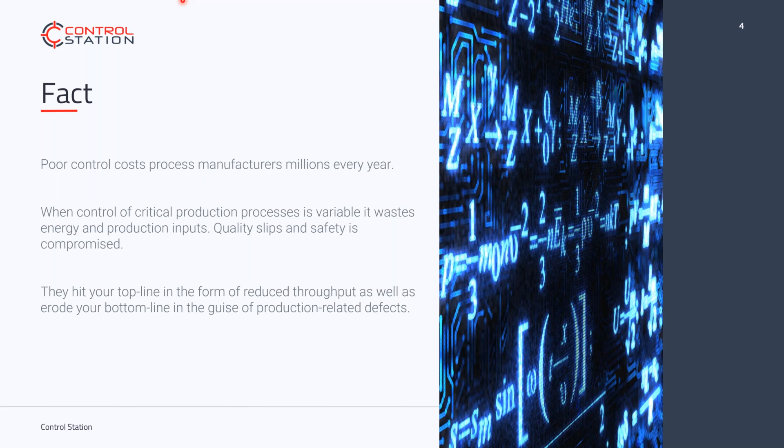there has been a decent amount of study on this. For example, relatively old, maybe 20 years ago, there was a UK-based study that talked about the economic effects of poor control. And this is what was seen: there was a decrease in throughput and yield of 2 to 5%. There was an increase in energy consumption

and product defects. Again, this is a relatively old study, but we have seen these effects come to bear time and again in different processes. The study was called Invest in Control, Payback in Profit. So basically, studying a variety of production plants, they were able to determine that these were pretty much industry standard things. And we've seen this anecdotally throughout our many years of experience with production plants.

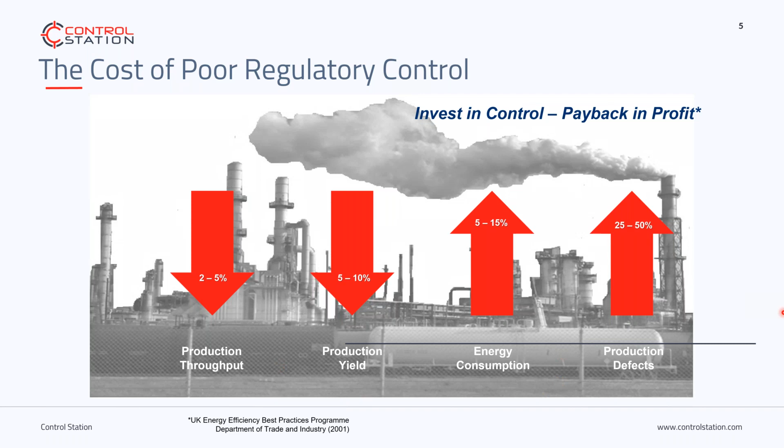Ooh. As I try to get to the next slide. Oy, my pointer is trapped. Just what I wanted to have happen right now. There we go.

Okay, good. So as I mentioned, even when a plant is in automatic mode, it still is not going to be operating at its most efficient 85% of the time generally, as found. When you have control-related problems or valve-related problems, we find that sometimes controllers are tuned poorly to mask those problems. Perhaps you have a sticky valve and you've decided to detune the controller to make that happen.

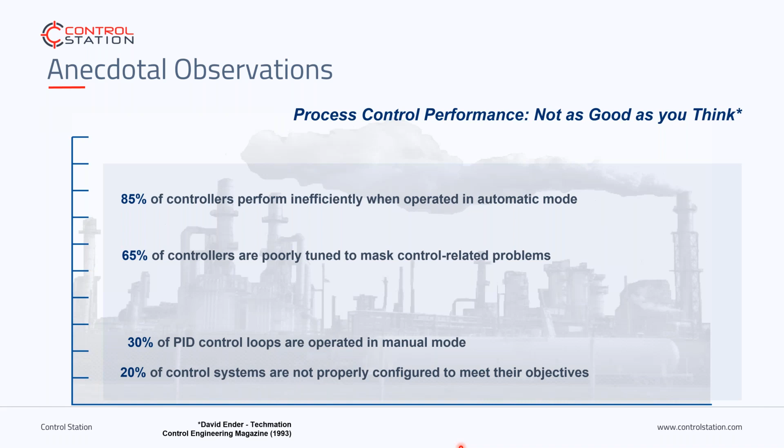There are many situations in which the control loops are operated in manual mode, 30% depending on the site, the time, and the operator. And just in general, a loop tuned to look good might not actually meet the total objective. For example, a surge tank might be tuned to have a perfectly flat level. Now, while that level might look awesome, it is not very well tuned.

But generally what happens is for all of these things, for yield and for energy use and for variability, generally the most profitable place to run is near a constraint. If you're trying to remove an impurity, you don't want to remove more than you have to, but you need to be below the constraint. Or for throughput through a plant, perhaps you want to be pushing as much through the plant as possible, but you don't want to cross.

So if you have variability in your process, on average, you're going to need to be operating at a certain distance away. But if you can reduce the variability, improve your control, then on average you can move closer to this constraint, whatever that constraint may be. Just having better control gives you more options and more safety, all these great things that we've come to recognize as the benefits of good control.

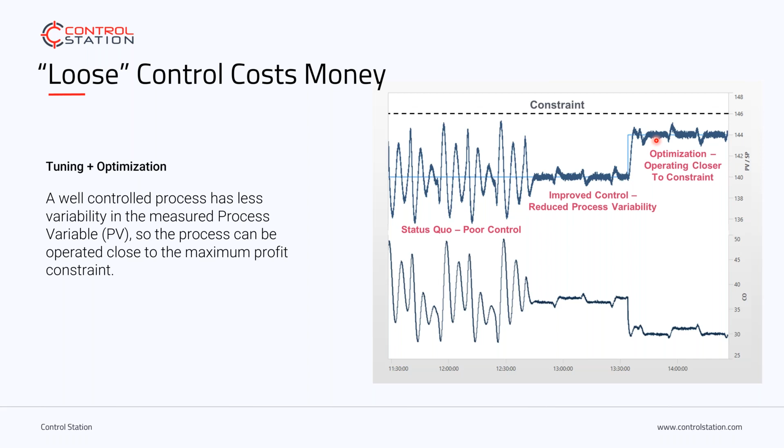So I'm going to pass this to Michelle for our first test your knowledge question. Thanks, Brett. Okay, in a minute you should see the question on your screen, and I'll read it for you because I had to take some of the words out because they didn't all fit. So you get the full effects of the question and all the information. All you have to do is take your mouse and select the one that you think is the correct response.

Controllers are designed and tuned based on the dynamic behavior of a process. What is meant by dynamic behavior of a process? Is it the first one, how the measured process variable responds over time to changes in the controller output and disturbance variable? Second one, how the controller output responds over time to changes to set point and tuning values? Or the third one, how the measurement filter removes random error from the measured process variable signal over time.

So I will leave this up for about another 30 seconds and give you time to respond to this.

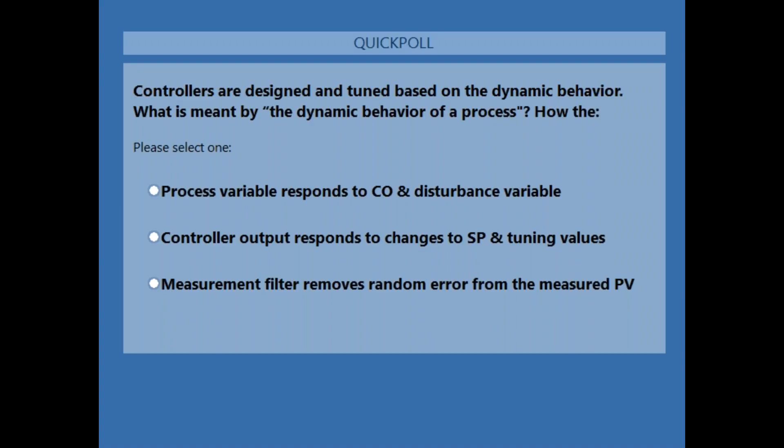All right. We got about 76. And so I'm going to close this. I'm going to share the results. So most of you picked the process variable response to CO and disturbance variable. And if you did, you are correct. Ding, ding, ding. Halloween treat for you. So thank you for participating.

I'm going to hide this and hand this back off to Brian. Yeah, so thanks, Michelle, and thanks, Brett, so far. So Brett, as far as process control 101 goes, what does dynamic process behavior have to do with the PID itself? Or what are the real world advantages that can be expected when there's a better understanding of dynamic process behavior for our friends on the phone today?

So first, let me talk about the results there. So completely understandable that some people would be talking about how the controller behaves, because in general, when people think of the process, they think of the whole thing. They think of whatever is being controlled and the controller. So completely understandable interpretation of the question.

But as we describe it here, understanding the process itself before there's any control connected to it is what we're talking about when we talk about dynamic process behavior. And as we'll see, it's very beneficial when we're trying to understand what's going on or how we're going to control a given control loop.

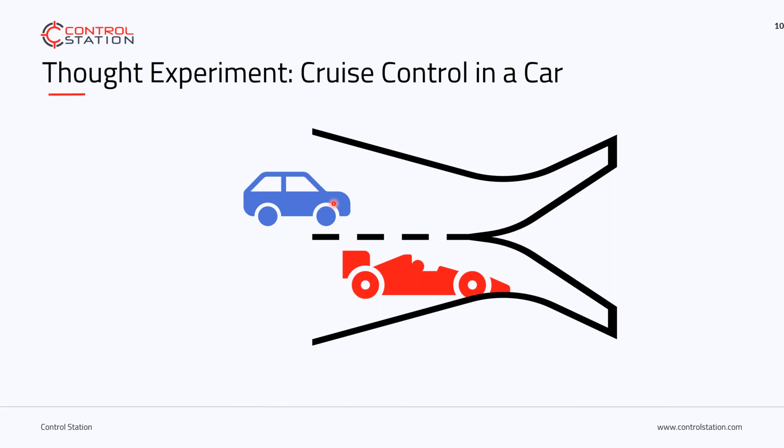So when we talk about dynamic process behavior, what we are talking about is how a controller output, or how a signal going into a process, will then affect what comes back to us, to the controller. That's the process behavior. The control loop is a process and a controller together. So the controller will send something out. In this case, it might be the gas flow to the vehicle. And then we have the response coming back.

And the reason that it is called the dynamic behavior is because we're talking about how it behaves over time. You make a change, either a step change or a dynamic change in the gas flow, and there is a measurable time-based impact to the process. But also there are disturbance impacts. So even if we are sitting there constant, if we go up a hill or see some sort of wind or things like that, we will also see dynamic impacts from those things.

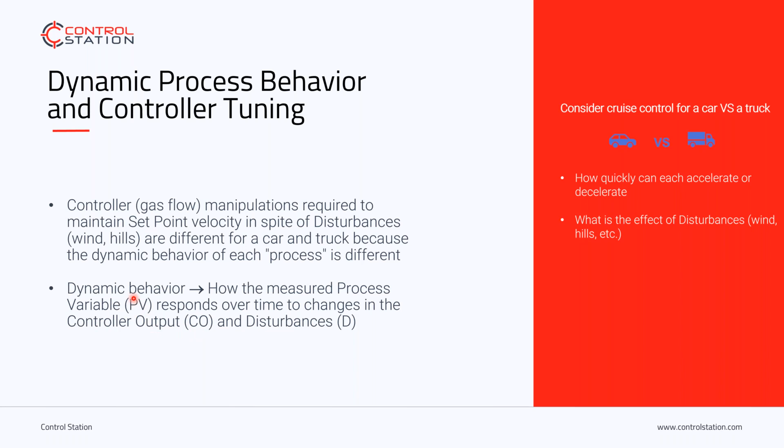When we're talking about the dynamic process behavior, we're talking about how the controller output affects the controller input, independent of whether the controller is on or any of those other things. So the way we understand this process is, we can look at it and get a feel for these things. But what we've come to find out is for accurate and precise controller tuning, what you want to do is bring math into the equation, so to speak.

You can look at it and you can adjust parameters until the end of the day, or until the end of your shift, until the end of the week, until the end of your life. But what we've come to realize is that by bringing to bear a procedural mathematical approach, you can get good tunings early on. And the first step in that process is modeling or analyzing the process.

So we, in this case, do a test of some kind, and we'll talk a little bit about tests in a little bit, but you want to make a change in the process. Maybe you step the valve closed, maybe you ramp up or step up the VFD, you make a significant change, and then you observe the response of the process in whatever location you happen to be working with.

If you have a furnace that normally operates at 800 degrees, you would want to do your testing or your understanding at 800 degrees. In the same way that a car behaves differently at 10 miles an hour versus 60 miles an hour, same as with most loops or most processes, you need to be doing your testing at a given design level of operation, as we call it.

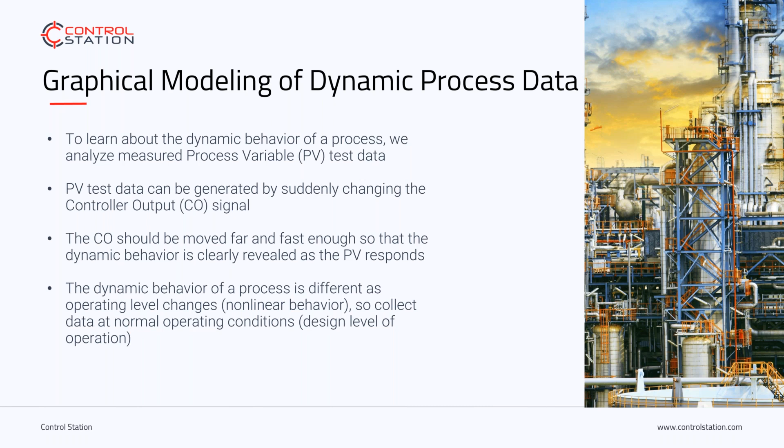After you do a test, there are a variety of ways to analyze that data. The way that we have found for normal, what we call self-regulating processes, like most temperatures and flows and pressures, is to analyze it using this first order plus dead time equation. This is an equation that has a similar shape to standard processes. It has a process gain, time constant, and dead time. These are variable parameters that will adjust the shape bigger and smaller to let us fit it on top of our data.

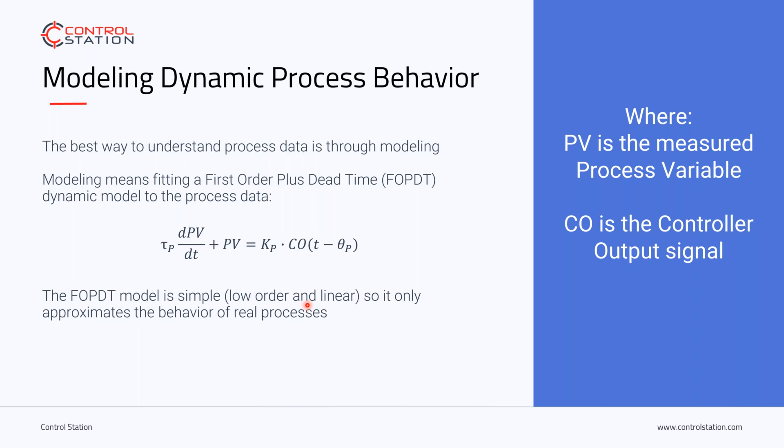Depending on the test you do, you can fit this information graphically, or you can use software to extract these parameters. It is a relatively simple equation. But so is the PID algorithm, and so it winds up being a good match. It is a low order linear differential equation, and the PID algorithm is the same. So it works out well for getting the information that we need.

So as I said, when you fit this to a process, you extract 3 model parameters that then unlock the understanding that we need to get good PID tuning parameters, regardless of the process. It could be a pH loop, it could be a temperature loop. Any loop that has this self-regulating shape will have some steady state process gain, which is an idea of the magnitude.

When I step the output, how far does the process go? Does it go 5 degrees? Does it go -2 PSI? What happens when I step the output? It has a time constant, so it has a measurable change. Does it take 30 seconds to get to a certain spot? Does it take 3 hours? Does it take 6 seconds? Whatever. The time constant gives us an estimate of that.

And then it also has a dead time. So all real world processes have an apparent dead time where you make a change and then you wait and you wait. And sometimes you wait a little bit more. And then, oh, there it is. Okay, so it takes time for whatever change to percolate or process through the system before you finally see a response. Okay, so those are the different parameters that you can get by analyzing. Once you have that information, then tuning becomes a much easier, almost trivial process. So that is dynamic behavior and a relatively straightforward way to understand that behavior.

So I'm going to pass it back to Michelle here for the next question in our test to test your knowledge. Okay, thanks, Brett. All right. Same deal as last time. You should see it on your screen in a minute or two. Again, take your mouse, click which one you think applies.

Which industry collects the most data? Is it financial banking industry? Is it the government? Manufacturing? Retail? All right. I'll give you some time to select, make your choice. Then I'll share the results. Okay, a few more seconds. Looks like we got almost 100% of the vote in. All right, I'm gonna close it down and I'll share the results. All right, so 15% think it's financial industries, 10% the government, 68% says manufacturing, and 8% says retail.

Yeah, let's talk about that. So yes, as I mentioned, there are a variety of different ways that you can move the process around, but not all data is created equal. So when we're trying to analyze the process, we want to see the dynamic behavior of the process. Back to our cruise control in a car example, if you're very, very slowly creeping up your speed, for example, as in this case, where we make a set point change in our cruise control, but for whatever reason, the gas pedal is just moving very, very slow. Now, of course, this is a reverse acting process, so this would not be what would happen in a car.

But as you are backing down slowly, we don't know for a fact that this is dynamic information. We could be moving through a series of steady states, similar to the situation where maybe in manual mode, we are slowly ramping up the output and we are observing a steady decline. This is not good data for a test. We want to see a sharp controller output step. It does not have to be a full step as in this case, but we want to see a sudden controller output change. In this case, they're saying 3%.

I would say case by case, 3% is a rule of thumb, but if you have a very noisy process or something like that, that might change the equation. You might need to make it a little bit bigger, but make a sudden change so that we can be clear, yes, we made this change. Here is the dynamic response, and then we can go ahead and analyze. So here we can see, this is a perfect example of this third point.

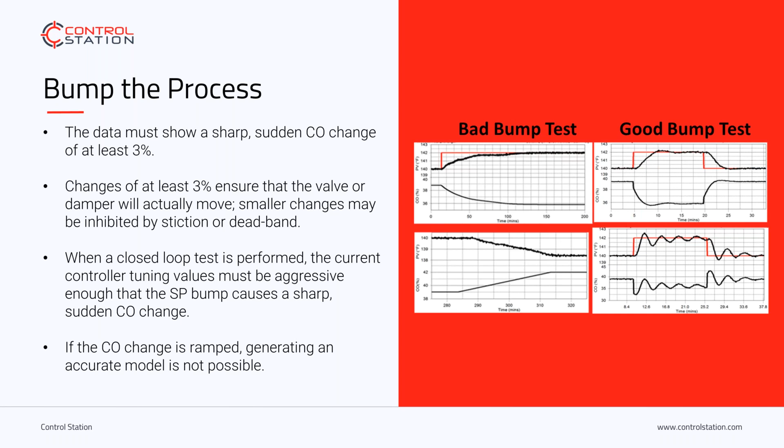In terms of what to do with the set point, so here in the set point we're bumping it up, we're bumping it down. There's a variety of different tests that you can do to get this data. So the most common ones here are a step test, where you step either the output and observe a response, or you step the set point and observe a response.

That's fine. This one is really advantageous because this one can be graphically analyzed. So by looking at this, going back to the previous section where we were talking about the first order plus dead time model, from this data you can extract just visually the gain, the time constant, and the dead time.

So that's beneficial. But at the same time, I have yet to go into a control room where they were really happy to just be like, hey, I'm going to step the output and just let it go. Is that all right? Not a ton of operators, especially for someone like me just coming in, will allow for this. So this is beneficial, and in certain cases, it's very useful. But there are other tests that are more beneficial in a

production environment. So for example, a pulse test is something that I will commonly do, either with a set point bump or with an output bump, where we will pulse either the set point or the output up and then pulse it back down. We don't have to wait for it to go to steady state and come back down. We just want to see a dynamic response, and that will give us dynamic information that we can use to understand the process, understand the model.

So this is really beneficial, especially if we've got that constraint situation. Way back at the beginning of the talk, we were talking about how you want to be operating near a constraint. If you have a constraint right here, you don't want to go here, right? Maybe you're operating very closely to the constraint. You don't want to cross that line. No problem. You can bump away from it and then bump back. You won't cause any issues with failing product or throughput or things like that. You will still get the dynamic information you need.

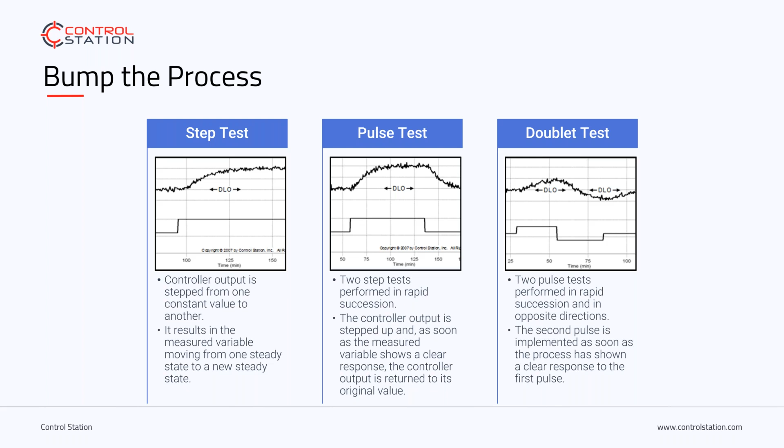Now, once you have that, there's still a couple things that you want to look at on the collection side. So one of the big problems we see sometimes is then getting this data back into software or Excel or whatever, or tuning packages or stuff like that. What we have sometimes is an issue with data aliasing. So what can happen, especially if you're looking at historical data, is you might not be looking at pure dynamics.

You have to understand that that's what's happening, and you may need to go to a different source for the data. Perhaps instead of the historian, you want to connect directly via OPC, or you may need to at least temporarily change the configuration in the historian so that it's archiving more quickly, maybe on change or some sort of band kind of thing.

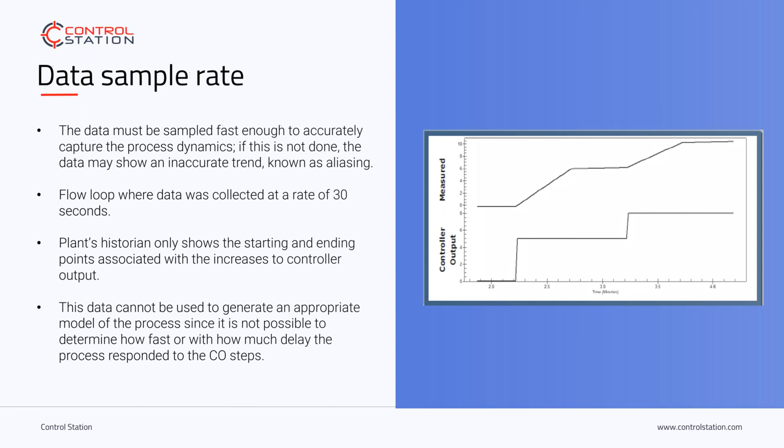Okay, in terms of rules of thumb for sampling, as we talked about briefly at the beginning, the time constant of the process is a measure of how fast it responds. And we didn't go into detail about how that's derived, but basically the rules of thumb are based on the time constant. So you want to sample 10 times faster than the time constant of the process. But as rules of thumb, you'll see here that flow and pressure are generally fast loops. So you're going to want to be sampling them relatively quickly.

Level, 1 to 5 seconds, but depending. I mean, if you have a huge tank, that can be slower, and it wouldn't have any impact. Really, the idea is that you don't want to miss anything, right? If you have a loop that has a dead time of 1 second and you're sampling every 30 seconds, you're not going to catch it.

Okay, so as you can see here, the recommended sample time gets slower as the process itself gets slower, right? So if you have a distillation column that responds on the order of 5 minutes, you can sample every 30 seconds and it'll be fine, but you can't always do that.

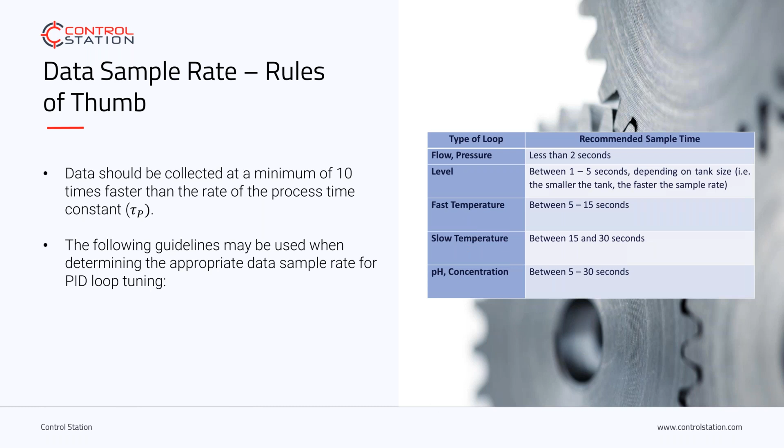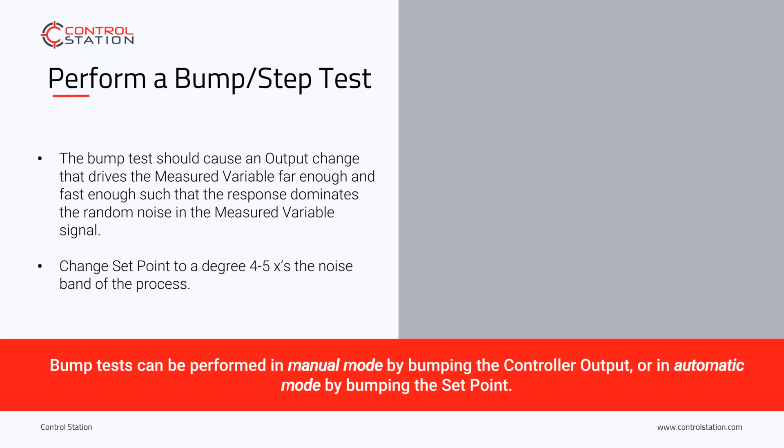Okay. So let's talk about one last thing here. So we talked about how we made an output change. You can change set point. If we're doing it in the process, in the real world, just to kind of walk through it, here is an example of a step test being performed. You can see here we've done a doublet test with a set point change.

This is a relatively smooth loop, so the noise is kind of negligible, but generally what you want to do if you're doing it in automatic is look at the noise band of the process. So you look at how noisy the process is, and then you make a step that's 4 to 5 times that, right? So that it's very clear what's the process and what's the noise.

We can also see here that we have a nice sharp controller output step. So that's good. And you can see, as I mentioned before, that you can do a test either in manual mode or as we've done it here in automatic mode. But this is kind of an example of a test. Here's another one, similar deal.

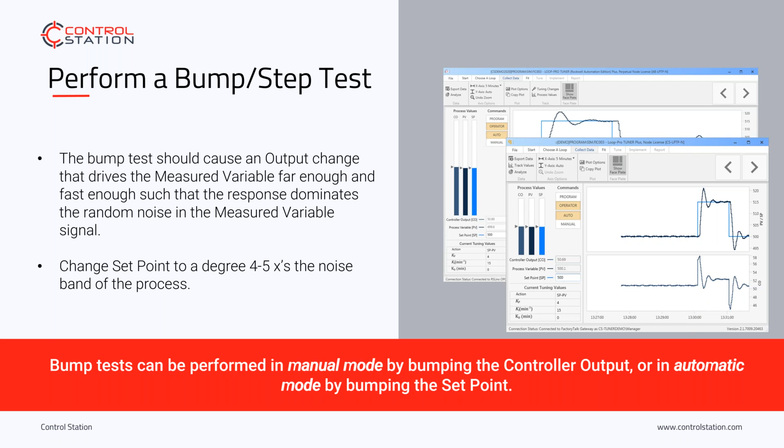All right, I will pass this back to Michelle for another test your knowledge question. I will say one thing about the last one. We don't know exactly how much data the government's collecting, right? So maybe they win. Oh, true point, Brett, true point. From everything I've been hearing lately, I would have put TikTok on there. The Chinese government wasn't one of the options. Anyway, sorry to interrupt. Please continue.

All right. Same deal as before. Give it a minute. Come up on your screen. Again, take your mouse. Here you can select as many as you want. What do you use for controller tuning? Step, pulse, doublet, or I don't tune? So I'll give you a couple seconds to give you a chance to answer that. All right.

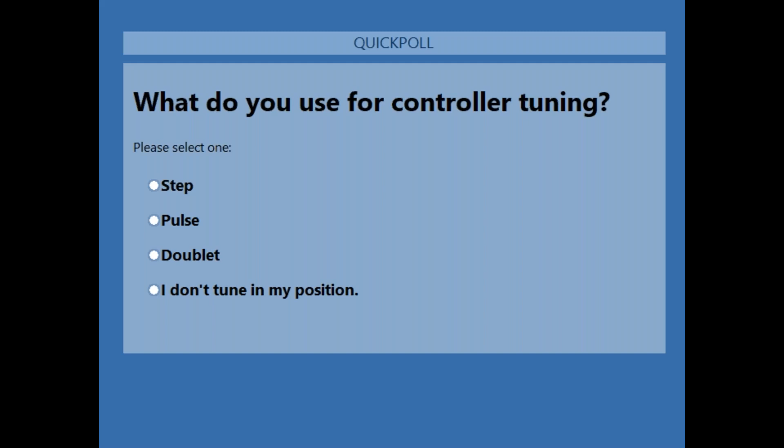Okay, looks like we got almost 80% of the people in. 85. All right, I'm gonna close it down. Share the results. All right. Majority of you do a step test, then Brett's favorite, the doublet, and then the pulse, with a few of you who just don't tune in your position.

All right. So with that, Brian. Yeah, thanks, Michelle, and thanks, Brett. So far today, we've kind of talked about what's at stake with poor control. We talked about dynamic process behavior, kind of touched on that. And then we talked a little bit about the mountains of data and the different types of data and tests along those lines. So kind of bringing this back to process control 101.

Why don't we delve into the idea of the PID itself and the different forms the controller should be used in different applications. We basically just drill this right down to proportional, integral, and derivative. If you want to go through those, Brett, and just kind of explain to us when and where you should be looking at those, if there's a rule of thumb, things along those lines.

Sounds good. All right. So yes, PID stands for proportional integral derivative. And so deep inside your control system, you wouldn't see this, but this is what it's doing. So it is looking at different parts of the error. So the error is how far away from set point you are. The proportional term is looking at what is the error right now, and that's it.

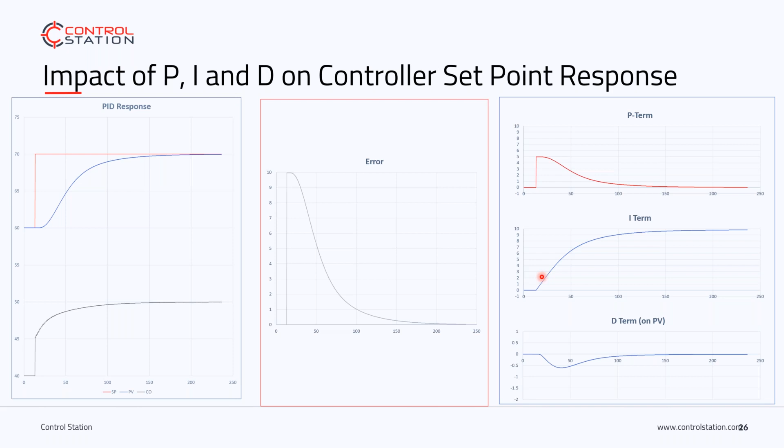So when you're handling load changes and things like that, the I term is very important. The P term and the D term are helpful for initial reactions to disturbances or set point changes, but it's the I term that lets you have staying power, that lets you stay at a new set point. So these are the 3 terms. Now this is a set point change. I alluded to disturbances, so let's look at those impacts now.

Okay, so, oh, I went too fast. Oops, sorry. Okay, so here we have a disturbance impact. Something knocks us away from set point downward, and our output kind of slowly works its way up until we get to a new set point. Our error again is a mirror image of what we're seeing here, and we can see a very similar pattern, right? The proportional term cares, and then once we get back to set point, it doesn't care anymore.

Okay, same thing with derivative, right? But in this case, it's actually interesting because it goes in both directions. Because we have a steep downward slope here and a less steep upward slope here, we can see that we actually cross 0. So the derivative term is actually pushing and pulling depending on where we go, kind of adding or subtracting.

But once again, it's the I term that lets us handle this load change. Because we were hit with a disturbance, our output went from 20 and wound up around 30. The I term is what let us absorb that change, find the new working output that led us to this. Now, I will also say, most of the time, unless you have a very slow process, derivative usually doesn't play a very important role.

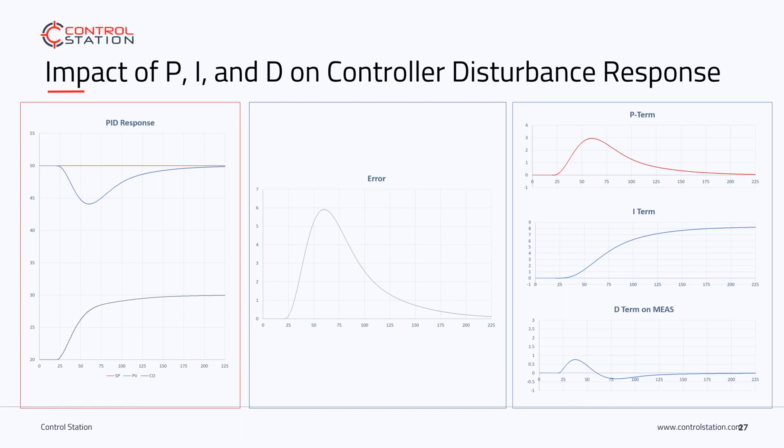But still, the PID stuff is the same, right? The P term will be looking for the error right now, and it will be making adjustments based on that. Same with derivative. Once you're back at set point, those two guys won't care. It's the integral term's job to adjust the output to get you to your working level. So the answer is yes, you would need a different model.

I'd be happy to talk about that at a later date or online at a different time. But in terms of this, this was a 101. That would be a 102 class.

Okay, thanks, Jose. You have another question here. What is the correct way to calculate error? E of t. Is it set point minus measurement or measurement minus set point? So the answer is it depends.

Well, especially if you're specifying a controller, that's how you specify. Is error set point minus measurement, or measurement minus set point? The answer is it depends, just as it is with most things in control. It has to do with the controller action. So if I had, for example, a temperature loop,

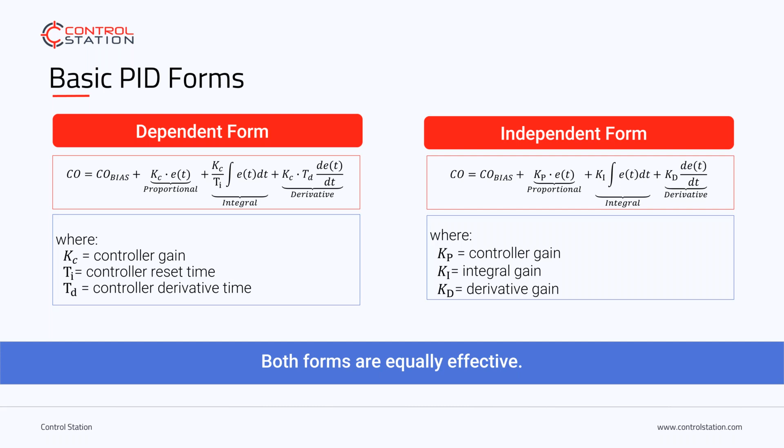Okay, so generally, this only is important when you first commission the controller, okay? Because that's when you decide, am I opening this valve or am I closing this valve when I have an error? So you set it then, and then it's pretty much constant and you don't have to worry about it anymore.

So the answer is yes, it's important, but if you set it incorrectly, it will be very obvious because the process will go the wrong way and the output will slam open or slam closed, and bad things will happen. So generally, don't change that. However it's calculated, as long as the process is holding near set point, it's set correctly, and just leave it like that. But that was a fantastic question.

Okay, thanks, Brett. Thanks, Jose. Does anyone else have a question? Brett, do you want to pull up the next slide? Oh, we do. Pull up the next slide.